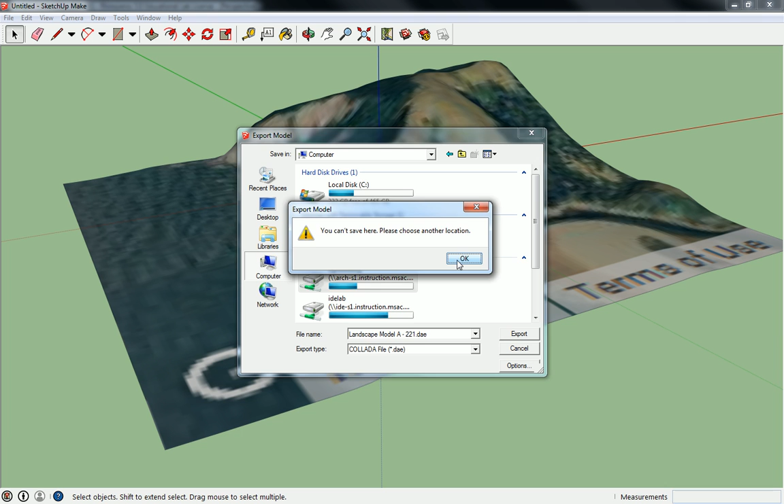Wait, can't save here. Oh, that's why. Export 3D model? 3D model, yes. So after you export, you can go into your model, and I would suggest zoom out a fair bit, because this thing is kind of small in comparison to what you actually grabbed. Then go to File, Insert, and let's see if that file type will work for us. Otherwise, we're going to have to look for another workaround.

Okay, let's see, type. Oh, looks like it might not grab Collada files. All right, let's try. Maybe there's another version of SketchUp we have to do it on, but let me try something real fast.

Yeah, let's try the SketchUp model version, so just save it as the SketchUp model. I didn't think that was how I did it before, but give it a shot. So I'll save this as Landscape Model A.

Then I'll go into Rhino, and I'll say File, Insert, Open, and SketchUp. There it is. Open. Hit OK. Hit OK. Hit OK. Oh, great.

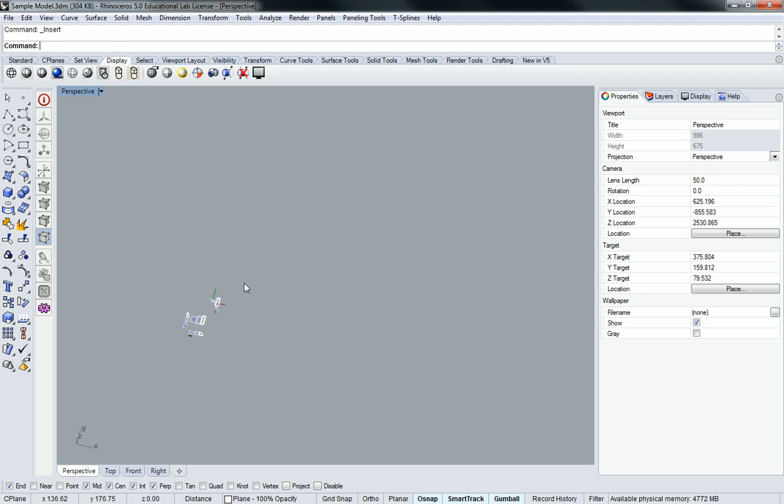All right, let's go back a version. Guys, let me just tell you, this doesn't change ever. You're going to deal with this for the rest of your career.

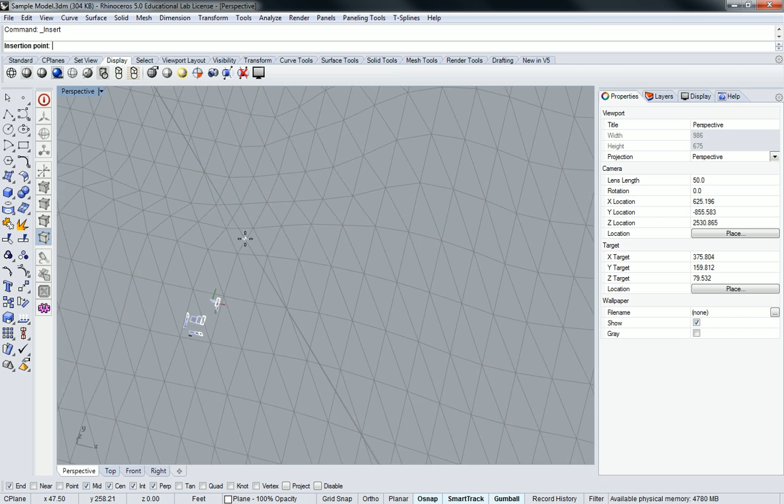Okay, now File, not import, I want to do Insert, Browse. There we go. Open. Okay. Which version did you see? You went way too quick. Yeah, sorry, I didn't explain it because I'm just trying to figure out why, how it was going wrong and just get it done. But anyway, I saved it as a version 8.

So here in SketchUp, just go to File, Save As, and then go down here to the bottom and change that to SketchUp version 8. Yeah, that's what the error message told me anyway, so I just listened to it.

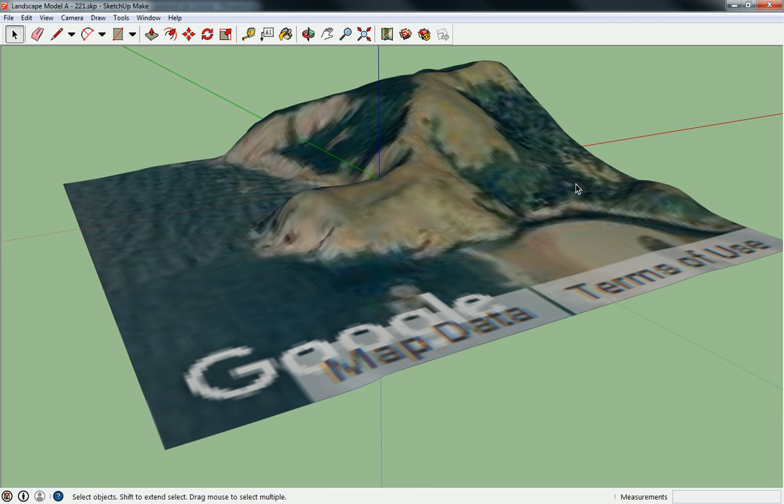So here we go, back into Rhino. Let me give you guys a chance to catch up, save it as version 8, and then go to Insert and drop it into your model, and then I'll show you about breaking it apart and doing things later on.

All right, guys, so the model here that we inserted has a couple of features. Apparently Ahmed's model came in with the map attached. I don't know what he did differently, but we'll figure it out later. This is a little different than what I'm used to, but it looks like it took the picture plane in with my actual terrain, so it all came in as one object, which basically means it's a giant block.

I can break that apart, and you'll see that it says one block instance up top. You can break that apart just like you're familiar with almost any other software package using the explode command. It'll just break it apart into individual components.

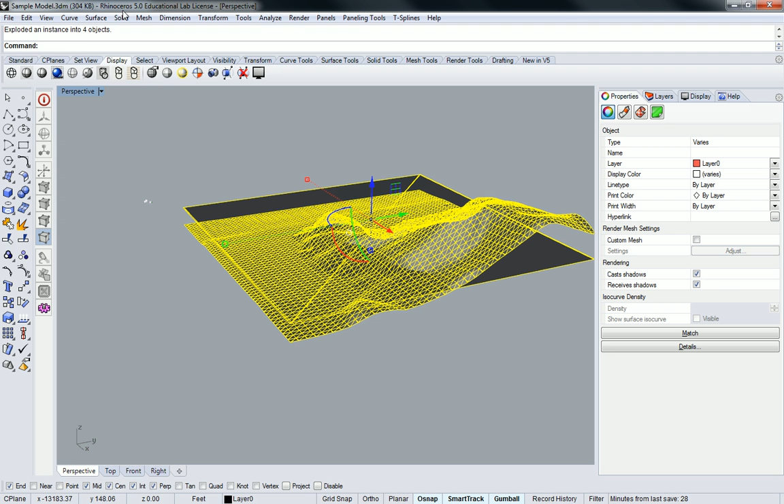So this one broke it into 4 objects, which basically means you've got a mesh here, 2 meshes there for some reason, and I don't know where I just deleted those 2, but I don't know where the other one was. There must be a fourth object somewhere in this thing.

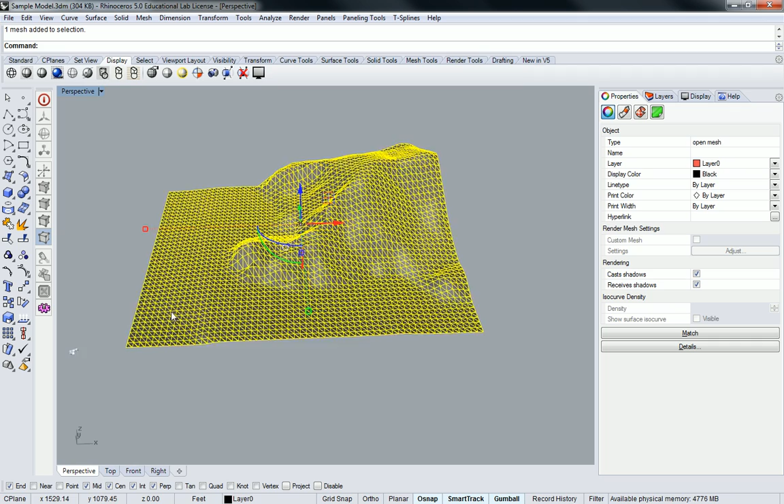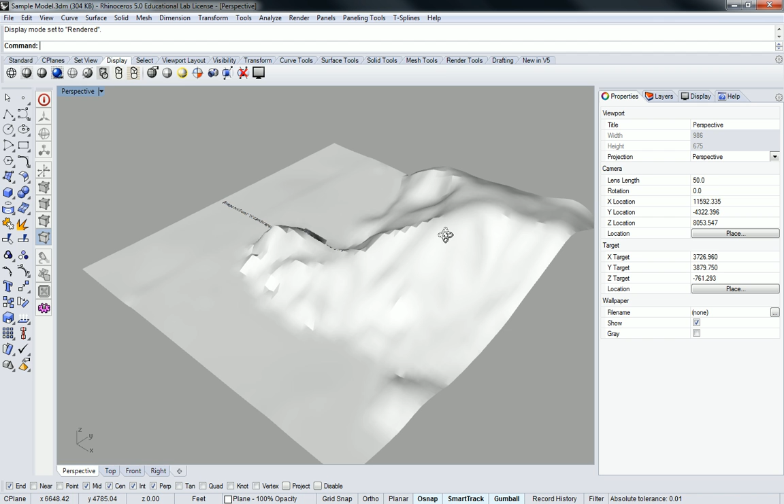But anyway, so this comes through as a mesh. What you should be aware of with a mesh is that if you look at it in rendered view, it's faceted, right? This is basically a triangulation, and you have options at your disposal to smooth it out and kind of work with it, but generally speaking, they're not fantastic. But one thing you can do, let me see something.

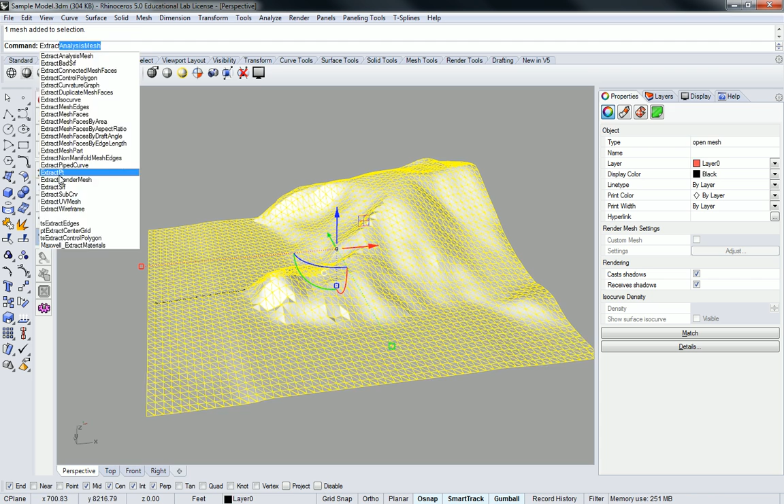Extract. I don't know if you can do extract points on a mesh, but let's try it. So extract PT. Okay, cool, it did it for us.

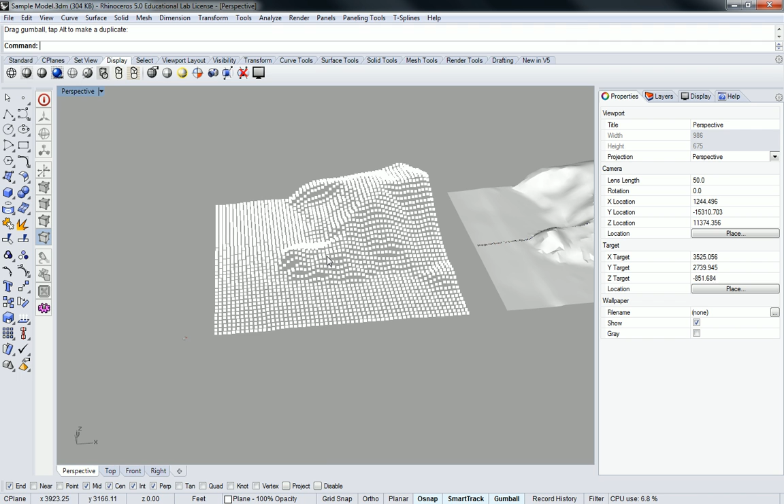So what extract PT is going to do—I grab my mesh underneath now, and I'm sliding this out. Extract PT just creates a cloud of points across where all the intersections are for this model. And if I wanted to smooth it out, I could do something pretty nifty called a patch. I'll go up into my top view, grab this, all of those dots, and do the patch command.

Patch has some settings you need to be aware of if you're going to do the smoothing out process. The sample point spacing is basically the resolution, how many points it's going to test for. The U spans and V spans are how many axes are aligned across this warped or bent surface. Think of U and V as synonymous with X and Y, except in 3 dimensions.

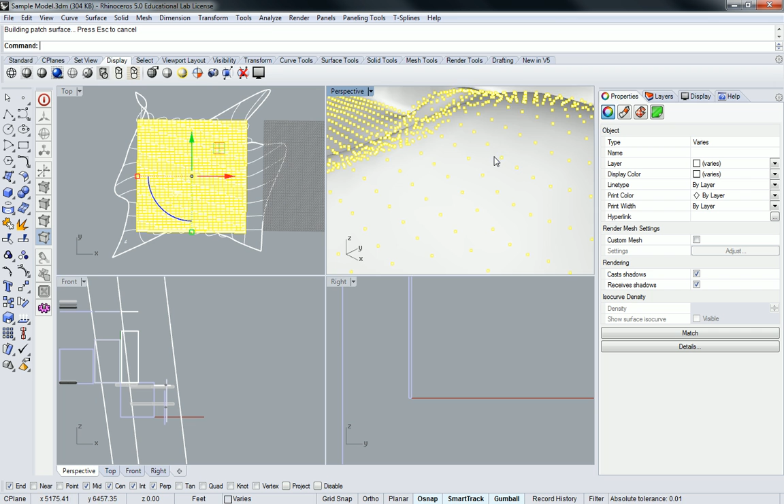Stiffness is just how close to the point it's going to get. I think we can go all the way down to 0.01 on that, though I forget if that's perfect. When you hit OK, it's going to look kind of crazy around the edges, because it has to bend from positives and negatives in order to make the surface. So it looks crazy, but it's really not all that crazy.

You just need to go through the process of trimming it off, but basically this is our hillside, and it looks a lot smoother now, like this.

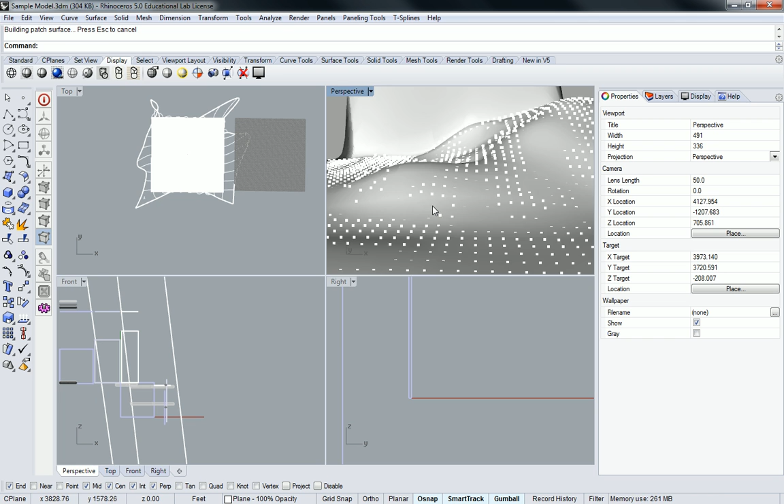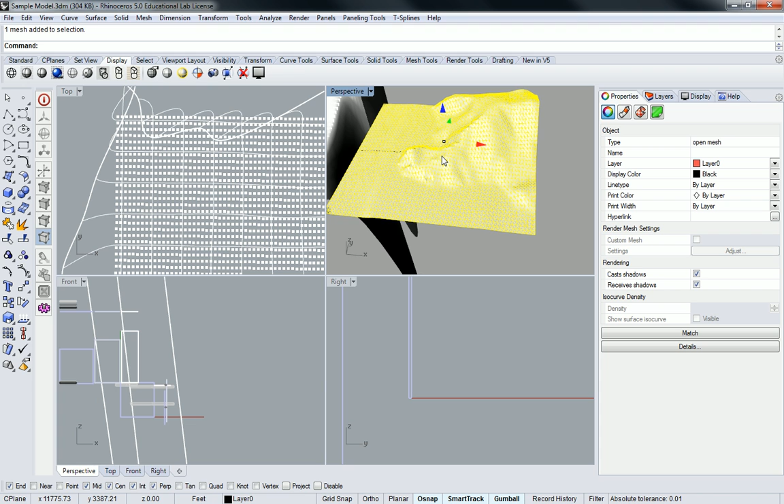So what I'm going to do here is draw a rectangle. I know, I'm doing a bunch of steps, maybe I should wait till you get here before I move on. Okay, so basically all I did was select this mesh and do extract point, then I moved it aside, grabbed all the points, and did patch, and I decreased the stiffness.

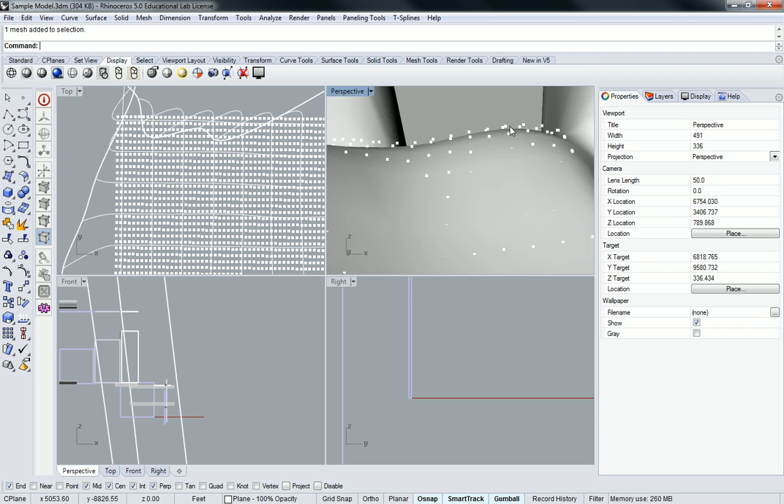What did you turn the stiffness into? 0.01. I actually think I might have wanted to go the other way. I'm going to try it again and see how it reacts. Not sure if I want to go higher or lower.

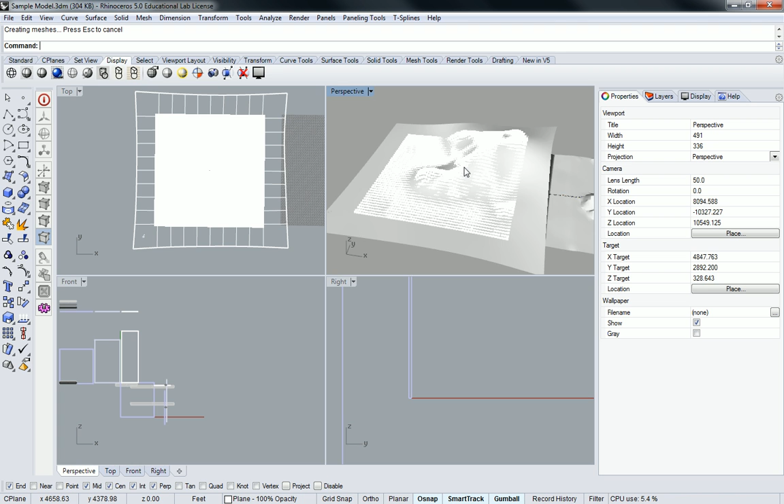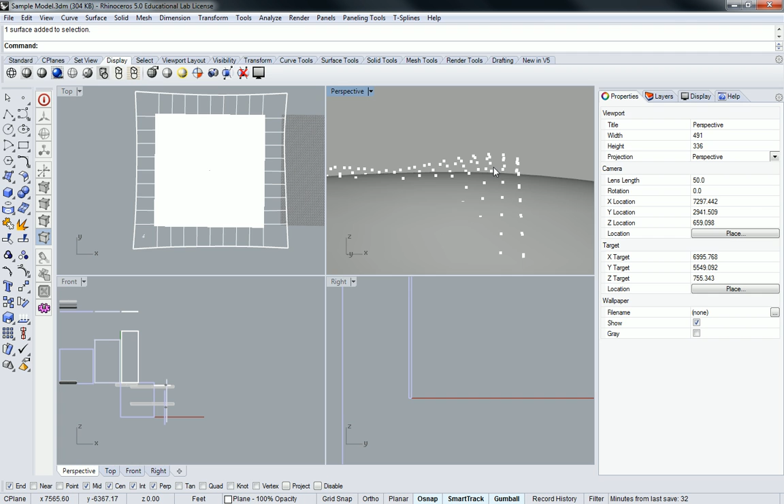So you left the U and V spans as 10? Yeah, I left them as 10, I don't generally need more. You can increase it up to like 25 maybe to make it a little more accurate, but you generally shouldn't have to. When I increased the stiffness up to 10, the actual surface is more rigid, so it won't bend as much to meet these points. When you go lower, like 0.01, it'll bend to meet the point.

There we go, that's why it's all crazy. So I'm going to pause real quick before I do the trimming.

So now to trim, I'm going to do it in a rather simplified way. I am going to just draw a profile curve in the top view, and then use the trim command using apparent intersections. Some of you know what that means, some of you don't.

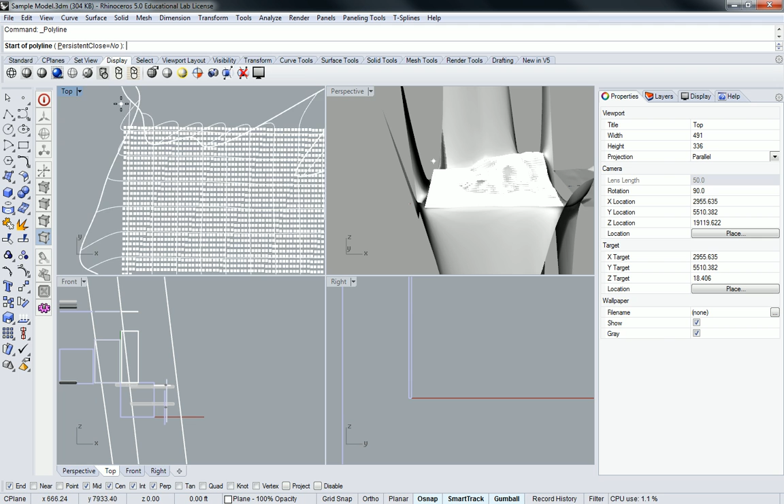Let's talk about it. Using polyline here, I'm going to snap to each of these points, but you'll notice that as I hover near it, it doesn't snap. This is an instance where you want to go into your object snap settings and turn on point, so that it'll actually grab this point.

And then I can go down to the bottom one right here, then this side, that one, and then that one. And there we go.

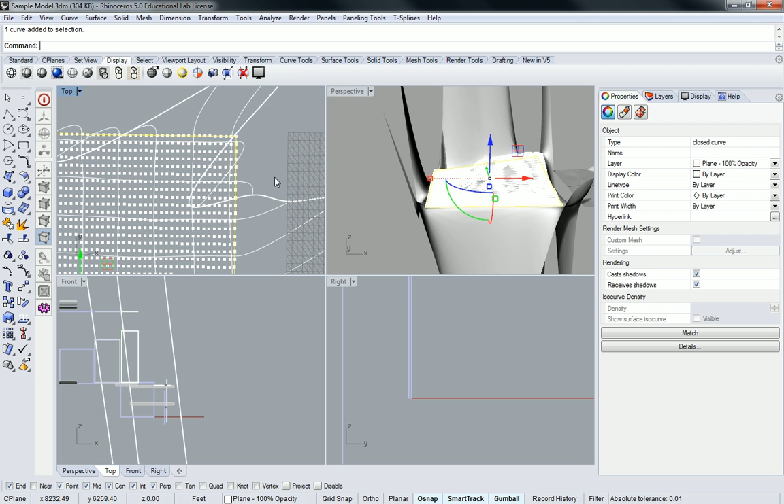Okay, so with that, now I have this profile curve that kind of goes around the whole thing, but some of the geometry sort of slips underneath and all this stuff. In some cases it might trim it all, in other cases it might not. But let's take a look at the result, and there might be a better way of doing this.

So I escaped. Here's just a side thing, best practice for you guys: when I'm doing a tutorial, I try my best to cancel any pre-existing selections before I do a command, because it's an easier way for you to learn new commands by knowing precisely what it's asking for.

So now when I type in trim, it's not going to jump to assuming the cutting object is the one I had pre-selected. Otherwise it would assume that, and wouldn't tell you which ones to select first. So now this is telling me, select your cutting objects. This means, like if you had scissors, which object would you be cutting with or along?

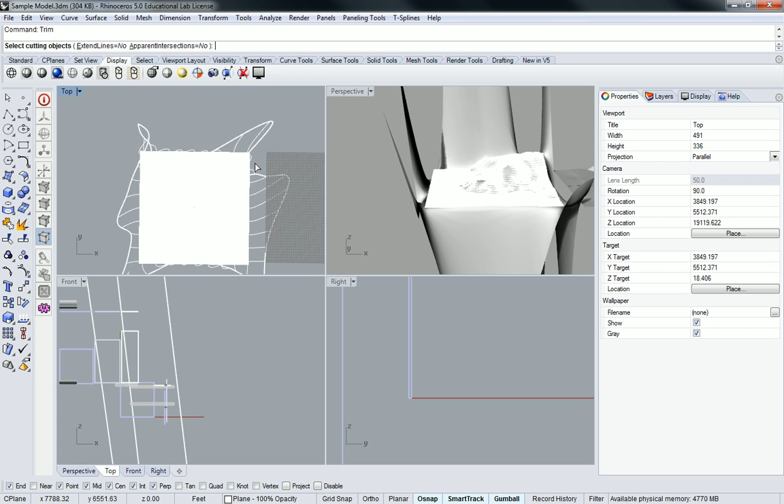So that would be my profile curve. Then you hit enter, and the object to trim would be any of the geometry around the perimeter of this thing, so I would just trim that off.

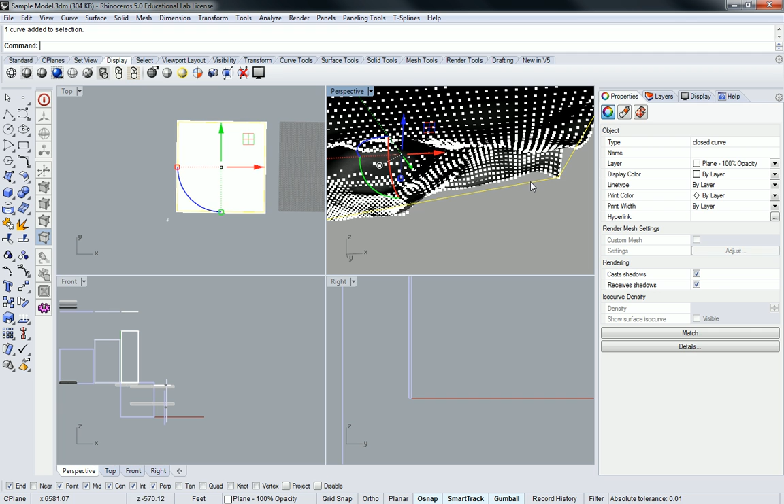And so I can get rid of that curve now. I will select all of my points and deselect the surface, and put those points on a layer and turn it off. So let me create a landscape points layer, change object layer for those points, and then turn them off.

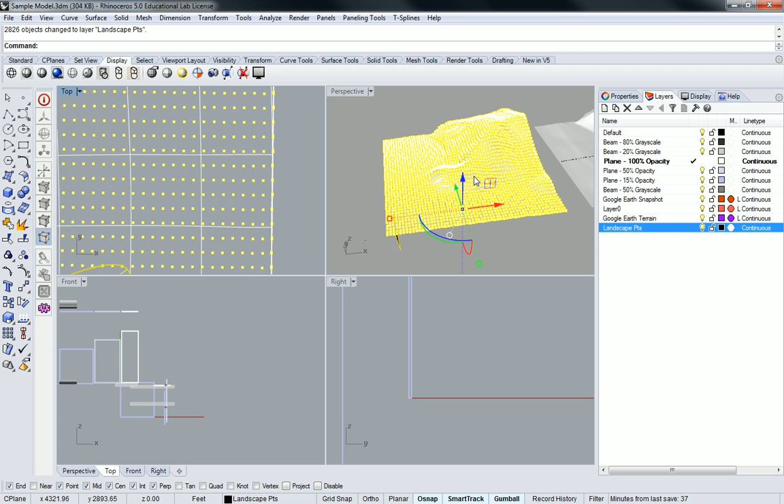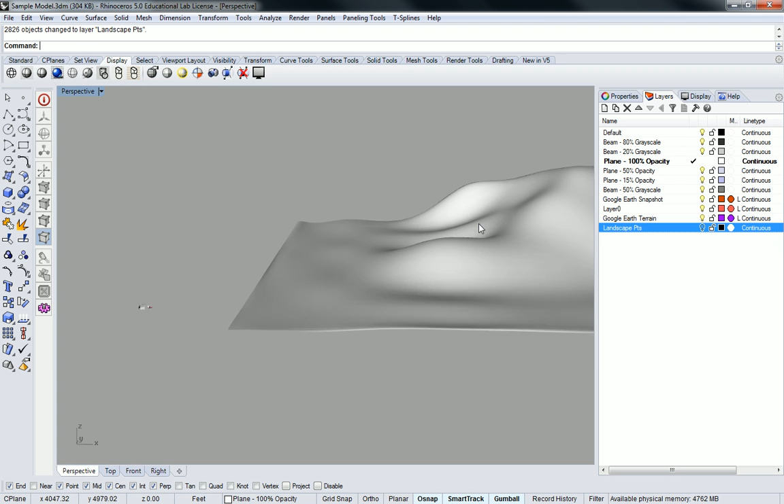And so here is the final result of the surface. I think that's a pretty convincing divergence from what we had before, where it was hyperfaceted, and now we've got something that's kind of hyper smooth. It reads a little better, don't you think? Okay, so let's get to this stage, and then we'll start to actually compose our scene.